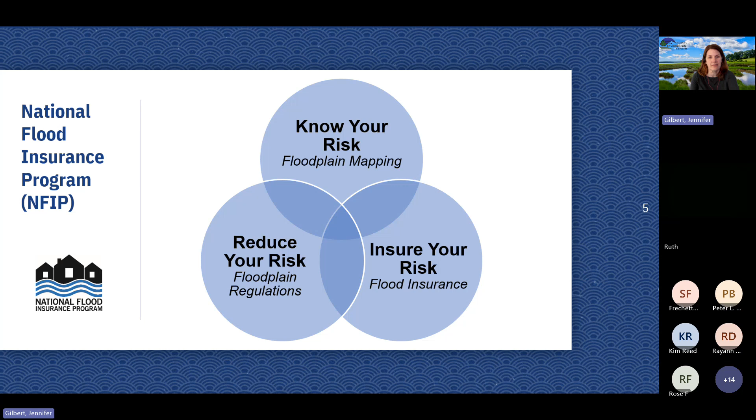All right. So to get started, we have to understand the types of buildings that are in the community and how they relate to substantial improvement. So first of all, there's existing buildings. These buildings were built prior to the initial flood insurance rate map that was issued for a community. These are also known as pre-FIRM structures, which is pre-flood insurance rate map. These houses were also built before any community floodplain regulations were in place. So it was before communities had joined the program.

So in New Hampshire, initial flood insurance rate maps range from the 1970s up to the 2000s. And generally, the initial flood insurance rate map and the date the community joined the NFIP are the same. So in this case, these existing homes, as you can see from the picture here, would not account for the base flood elevation. The base flood elevation is the height the water would get to during a 1% chance flood event. Since they didn't have any standards to build by, they just built wherever the land was without much recognition of what the flood risk was at the time because there were no maps. So these homes are the ones that the substantial improvement, substantial damage provisions would apply to if they met the criteria.

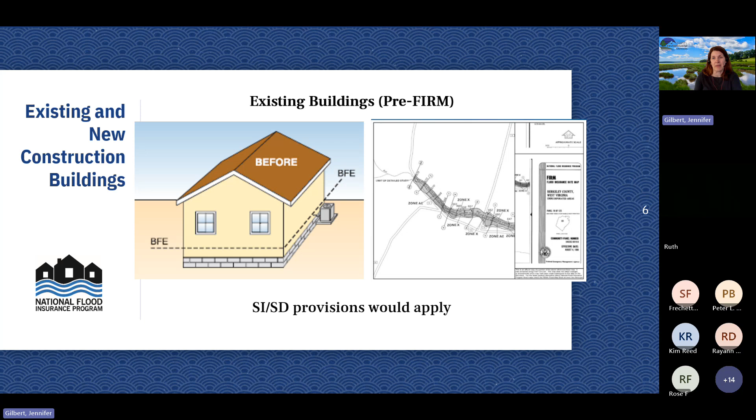The next set of buildings that you would find is new construction buildings. These are called post-FIRM buildings, post-flood insurance rate map buildings. So these homes were built when there was a FEMA map in place. It was after those initial flood insurance rate maps. It was also after the community has adopted their floodplain regulations. So in theory, those buildings should have been built in compliance at the time of the map that was in place and the regulations that are in place.

So the substantial improvement and substantial damage provisions would apply if there's a new map that's been issued since that house was built, if there's been an increase in the base flood elevation since the house was built, or the community's floodplain regulations have changed. For example, some communities required that the lowest floor be elevated to at least the minimum requirement of at or above the base flood elevation. Many communities now enforce that the lowest floor has to be elevated at least 1 or 2 feet or more above the base flood elevation.

So that's important information to know about these new construction buildings, because even though they were built at that time, things could have changed and they may need to be going up depending on certain circumstances. And we'll be kind of going through this in the building scenario part of the presentation.

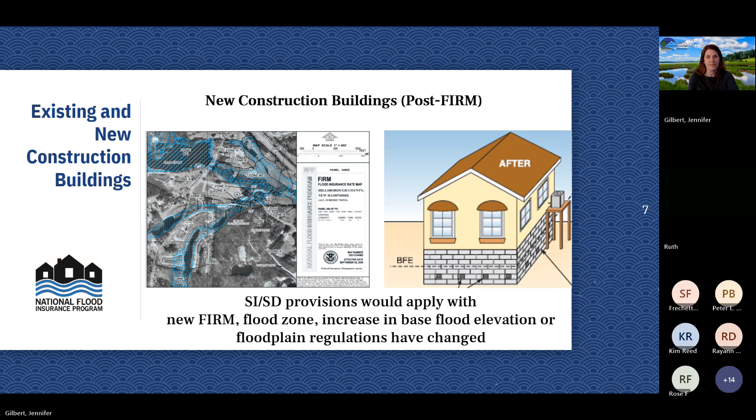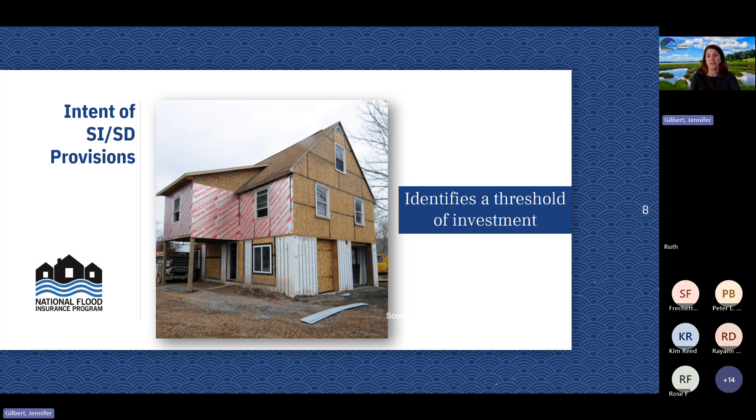All right, so the intent of the substantial improvement and substantial damage provisions is really to identify a threshold of investment above which improvements need to be done in a stronger, safer, smarter way. It also provides an opportunity to reduce or eliminate future costs and damages for existing structures. And it provides an opportunity to break the cycle of disaster damage, reconstruction, and repeated damage.

There are 2 main FEMA resources that are great places to go if you have questions or need more information about substantial improvement and substantial damage. First, there's the Substantial Improvement Desk Reference. This is the resource that I used a lot. Anytime I got questions about substantial improvement, substantial damage, I would be going to this. Even though it's dated 2010, it's still useful. It's still applicable. It's got a lot of great information in it.

In 2018, FEMA updated their answers to questions about substantial improvement, substantial damage buildings. This references the desk reference a lot, but it's in a question and answer format. So if you have a particular question, sometimes you can find that question directly in this resource and find that answer in there. So most of the information that I'm presenting today comes from these sources. So I just wanted to highlight them so you know that this is a place where you can go to find out more information.

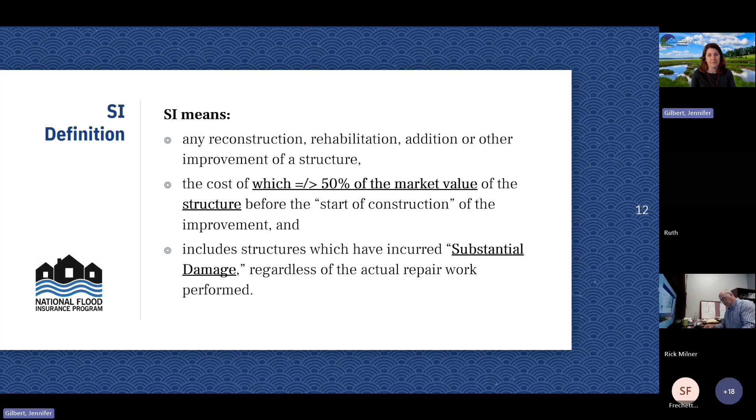So I've had questions in the past of why is it 50%? And that was really chosen as a compromise between two extremes. One extreme would be to prohibit all investment in existing non-conforming buildings that do not meet the minimum NFIP requirements. The other extreme would be to allow buildings in flood hazard areas to be improved in any fashion without regard to flood risk. So that's where they came about with the 50%, which a lot of people call the 50% rule. The term substantial improvement does not, however, include either of the following.

Any project to correct existing violations of state or local safety code specifications identified by a local code enforcement official. So to be excluded, the cost must be the minimum necessary to correct a violation or condition that predates the application and was previously cited by an official who has authority to enforce the community's health, sanitary and safety codes. So this is not something that's going to be found at the time of the substantial improvement determination. It should have been already documented as an issue prior.

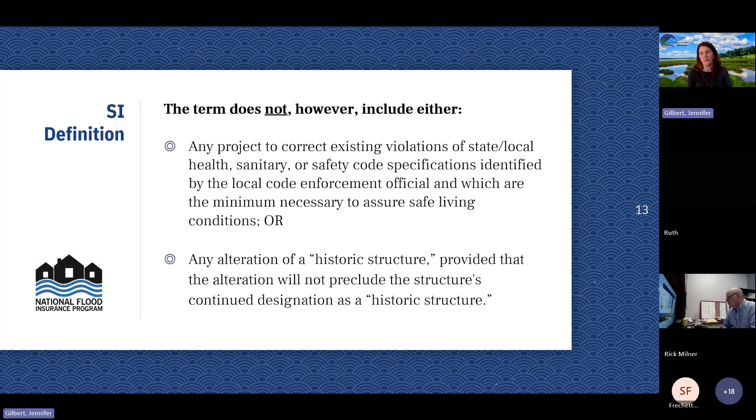The other exemption is regarding historic structures. Any alteration of a historic structure, provided that the alteration will not preclude the structure's continued designation as a historic structure. So again, the community's floodplain ordinance defines the criteria for what is a historic structure, which is usually on a state or federal register. So those do not have to meet the substantial improvement requirements. There is a great FEMA guidance document about historic structures, and it goes more into these details about this exemption and what can be done with historic structures.

Okay, some substantial improvement examples. Rehabilitation or remodeling of a structure with or without modifying the external dimensions. So if you have a structure that gets torn down, but the footprint of the foundation remains the same and you just build new on it, that is considered a substantial improvement. Lateral additions that may or may not involve structural modifications of the load-bearing structure of the existing structure. This is an example we'll be going through during the building scenarios later in the presentation.

Vertical additions, repair, replacement of foundations, including extending existing foundations, repair of damage of any origin that is necessary to restore a structure to its pre-damage condition, work on structures that were compliant at the time of construction. Again, it's one of those where you have a new construction building where either the flood zone changed, the base flood elevation changed, or the floodplain regulations of the community had changed.

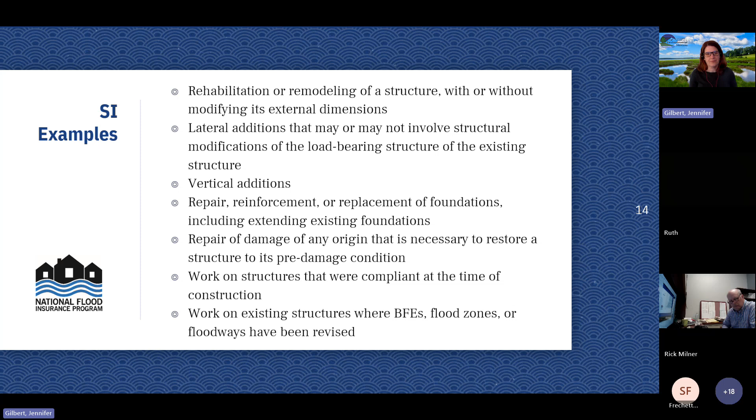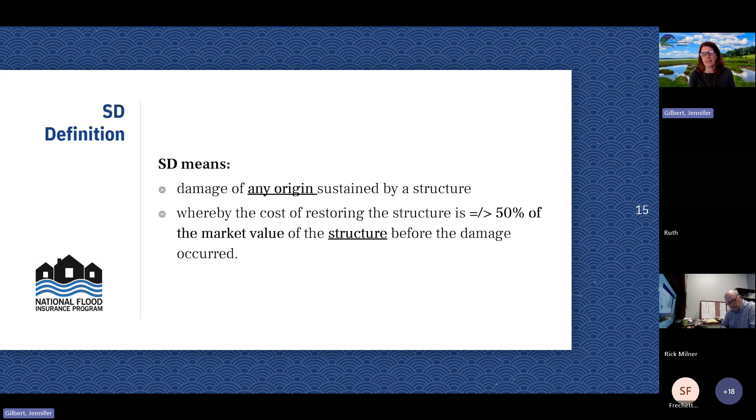All right, so we're going to the substantial damage definition now. Substantial damage means damage of any origin sustained by a structure, whereby the cost of restoring the structure is equal to or greater than 50% of the market value of the structure before the damage occurred. Now, there's no exemptions regarding substantial damage, although substantial damage and substantial improvement are intertwined. So if you do have, for example, damage to a historic structure, that exemption is still in place.

So some substantial damage examples include, and this is in reference to the fact that the substantial damage definition says damage of any origin. A lot of times it gets confusing because it's a part of a floodplain ordinance, so people think it's only because of a flood. But it can be of any origin, whether it's a natural disaster or a man-made event. Flood, tornado, wind, house fire, a burst pipe.

Some of these on the list are ones that I actually have dealt with in the past. We had the tornado that went through New Hampshire in 2008. As you may recall, it went around Northwood Lake. Some of the homes around Northwood Lake were damaged, and they were in the floodplain of Northwood Lake. I did some outreach with the town of Northwood to remind them of the substantial damage requirements.

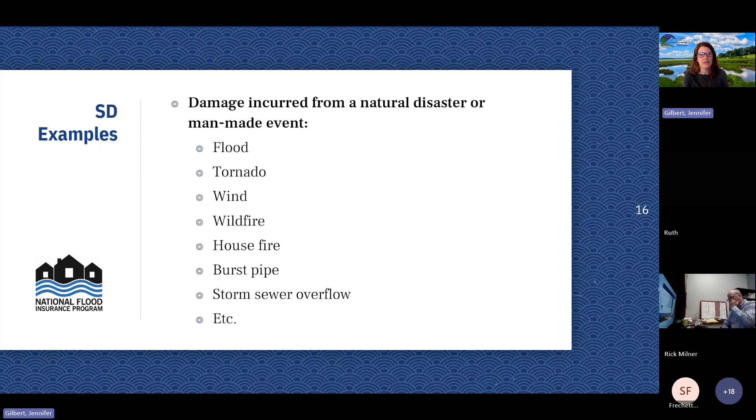Okay, so the provisions that are in a floodplain ordinance for a community that participates, this language comes from the Code of Federal Regulations, which a lot of communities have adopted over time. It requires that all new construction and substantial improvements of residential structures within Zone A's on the community's FIRM have the lowest floor, including basement, elevated to or above the base flood elevation. That's the minimum standard established under the NFIP.

The one thing that I learned with this language is it really doesn't highlight substantial damage. The only way you can link substantial improvement to substantial damage is by looking at the definition of substantial improvement, which has that reference to substantial damage, and then you can go to the definition of substantial damage. But in case nobody goes to the definition, you don't necessarily see it, and so sometimes it can be out of mind. One thing that I did when I updated the state's higher standards model ordinance is I specifically put substantial damage into the ordinance language itself so that it's not only substantially improved, but substantially damaged as well.

The other thing that I want to highlight in here is that I also put 1 foot above base flood elevation. So this is just a reminder that our state building code as of 2015 did require that all structures in a special flood hazard area be elevated at or above 1 foot above base flood elevation. So just a reminder on that. And in addition, the state building code that we have now, which references the 2021 I-Codes, does have these same substantial improvement and substantial damage provisions in the code as well. And in those provisions, they specifically call out substantial damage in the regulations, as well as substantial improvement.

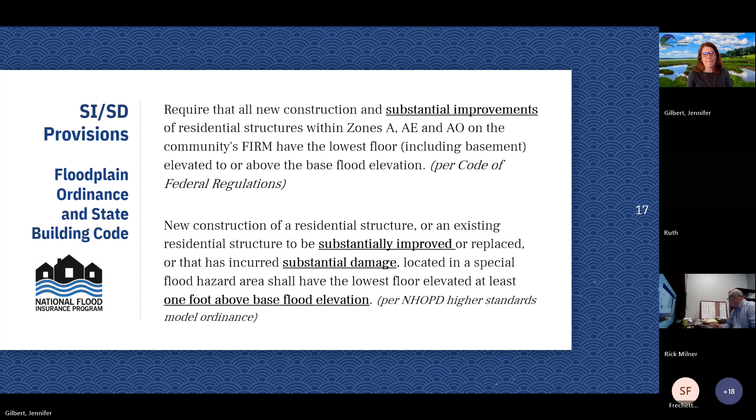All right. So when a structure is determined to be substantially improved or substantially damaged, it must be brought into compliance with requirements in your community ordinance as if it was new construction. So what does a compliant residential structure look like?

So this is an example of a new construction in a zone AE. What we have here is you need to have the lowest floor at or above that base flood elevation. There are certain things you can do to help elevate this. This house is built on a full foundation system, which you are allowed to do to get that lowest floor at or above that base flood elevation.

In addition, there's a couple other things that have to happen to make this enclosure compliant. It has to have the required number of flood openings in the enclosure walls. It can only be used for parking, access, or storage. And the floor of that enclosure has to be at grade on at least one side. In this case, this space is being used as a garage. It has the flood openings, and it moves the lowest floor up to that base flood elevation.

This is an example of a new construction in zone VE. You have wave action in zone VE, so there are different standards. You cannot have full foundation walls in VE zones because of that increased velocity. So you have to elevate on piers, post piers and columns, which is an example here.

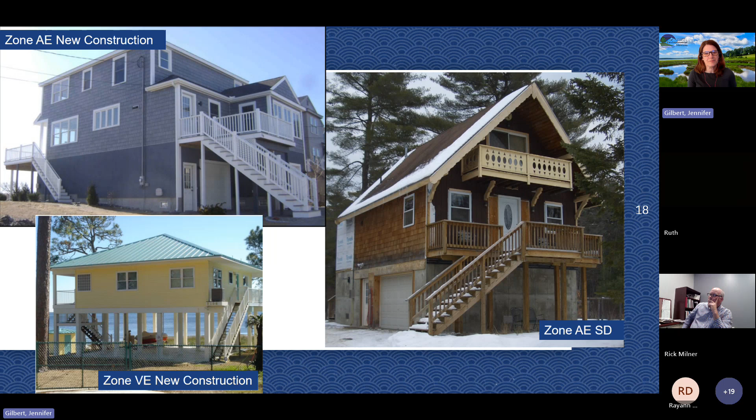Shanti, do you have a question? Yeah, I have a quick question that has to do with the historic exemption.

Yep. We're not qualifying if it can be maintained as a historic building even after the work has been performed, then it's not subject to the same restrictions as would be — this is from the International Existing Building Code, but it looks like it lines up with what you said earlier. So the question is, because we have a historic building that we're working with near the water, and they want to put an addition on, and it would be less — the cost of it would in fact be less than 50% of the market value, but it would also maintain its designation as a historic building, regardless of the cost of construction.

So we're at this gray area, we think it's a gray area. Hopefully you can answer: with respect to their floor, it will be at elevation 8, whereas we would want them to be a foot above elevation 9. And they may or may not be able to do that. But given this section for exemption on historic, would they even be required to? Could they put an addition on and not comply with the elevation requirements because it'll be a historic building before and after?

That is a good question. I'm questioning — I'm thinking in my head about the addition part. That's kind of stumping me. Usually I've dealt with interior improvements to a historic structure, but the addition piece — my thought is that exemption still remains in place, but I would want to follow up with you on that, because the addition piece is an interesting question.

Right. So we talked before about the provisions for residential structures, but I didn't really go into non-residential structures. Non-residential structures are required either to elevate so it's at or above the base flood elevation, just like residential structures, or it must be dry flood proofed so that the area of the building below the base flood elevation has to be dry flood proof, essentially cannot let the water enter the building. So you have to retrofit doors to prevent that from happening. You also need a floodproofing design certificate, which is certified by an engineer.

So in this case, the proposed substantial improvement is an interior improvement to an existing non-residential structure in Zone A. It's been determined to be a substantial improvement. They chose to dry floodproof instead of elevating. So they just need to go through that process of providing the required documentation for that floodproofing.

Peter? Yeah, I'm just wondering, can this building be occupied then? I mean, doesn't it seem like if they're dry floodproofing, they can't open the doors during a flood. So does it have to be unoccupied, or is there any, do they speak to that at all?

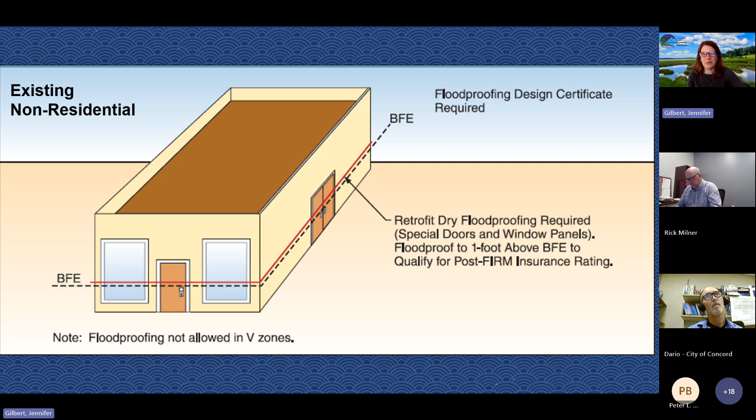All right. So manufactured homes, this is an existing manufactured home. It has its floor below base flood elevation. It's in an A zone. The proposed work includes improvements to the existing home and a lateral addition.

So what needs to be done with this is because there's improvements being done to the original building and the addition has caused it to be a substantial improvement, both the existing structure and the addition would need to be elevated as if it was new construction. So it needs to be elevated above base flood elevation. The anchoring needs to be attached to a permanent foundation, which it already was, but just lifted up. So that's an example of when you have improvements to the existing structure and an addition.

So this is another existing building in Zone A. It's slab on grade, and below base flood elevation is the lowest floor. They don't propose any improvements to the original building, but they propose a lateral addition, and there's going to be no structural modification made to the common wall or the roof. So what do they need to do?

Because it's a substantial improvement, the lateral addition will need to be elevated as if it was new construction, based on the current map and current regulations. But because there was no improvement made on the existing building, and there's only essentially a doorway between the two, with no structural modification to the roof or the house, only the addition needs to be elevated to that base flood elevation. Again, they have an enclosure that has flood openings and meets all those other requirements.

So this is an example of an existing building in Zone A. It was slab on grade. The proposed work includes a lateral addition and work on the original building, which does include a structural modification of the common wall or the roof. So the proposed work, the addition and the improvements to the original house, was determined to be a substantial improvement. So not only does the addition need to be elevated and brought into compliance as if new construction, but the existing structure does as well, because of those improvements made and because of that structural modification.

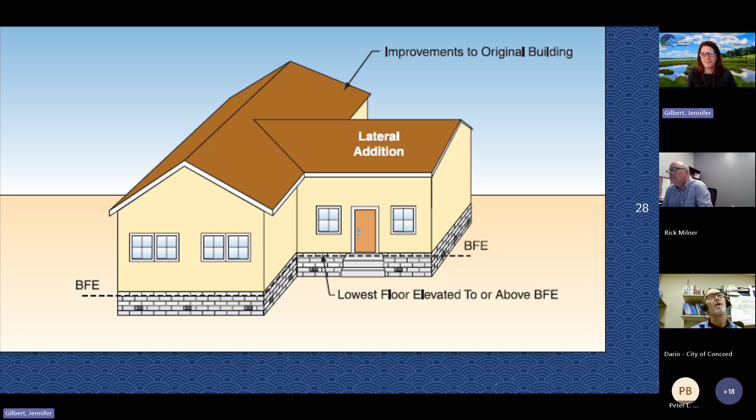All right, so now we'll move into a V zone. These V zones are the ones that are elevated on post, piers, and columns. This is an existing residential building in a V zone. It's slab on grade, and the proposed work includes work on the original building, and they want to do a lateral addition. So this was considered a substantial improvement. This is what would need to happen to bring it into compliance: it would need to be brought up on post, piers, or columns to get above that base flood elevation, and the addition can then be added. So both the existing structure and the addition then need to be elevated to bring this into compliance.

So now we have an existing residential structure in Zone VE. The proposed work includes work on the original building and a lateral addition, which are both considered a substantial improvement. You can see this one is already on post, piers, or columns, but the lowest floor is still below base flood elevation. So what needs to happen? These are two options if someone wanted to do this: bringing that whole house up further above that base flood elevation, whether the vertical addition is on top of the existing structure or below it. That is what needs to happen for it to be brought into compliance.

All right, so another new construction residential in Zone VE. This is new construction, a little different than what we were talking about with existing buildings that were built prior to the maps. All improvements, including additions or repairs to a new construction building, must be elevated to at least the height of the new construction building, regardless of the value of that work. The work shall not compromise any of the NFIP requirements that the existing building was required to meet when it was initially built.

So somebody has a new construction building that had been built in compliance, above base flood elevation. They want to put an addition onto that house. That addition has to meet the same requirements as that existing structure, regardless if it's a substantial improvement or not. It has to remain the same. If it didn't meet the same requirements, it would bring that whole structure out of compliance. So you don't want that. That's a case of that.

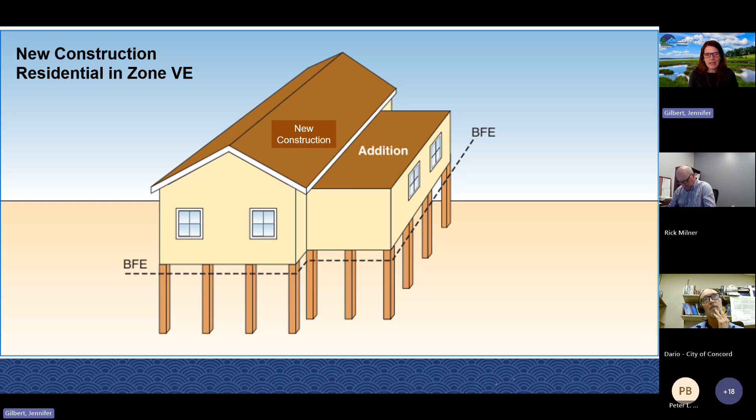And then one last building scenario. This is a new construction that was built to the base flood elevation that was in place at that time that it was built. Since that time, there's been a new map with a new base flood elevation. And now they want to add a lateral addition to that structure.

There's no improvements proposed for the original building, they just want to add the addition. So what will need to happen is the addition will need to now meet the new base flood elevation requirement and be elevated farther up than the existing building. The existing building does not need to meet that base flood elevation because there's no improvement. Also, I forgot to highlight that there's no structural modification between these two buildings, it's just a doorway from one to the other. If there was a structural modification here, that existing building would also need to meet the new base flood elevation.

So that's a lot. Shanti, question? Yeah, so maybe I had it wrong then. So if the addition even doubled in cost relative to what the existing market value is of the existing structure, you wouldn't have to do anything with the existing structure. Is that true? I thought that once you went beyond that 50% with the addition, now you'd have to raise the existing as well. But no, only if you're doing something in the existing. Is that what you're saying? So I could do a $2 million addition onto a $1 million home, and only the addition would need to meet the BFE requirement. Is that right?

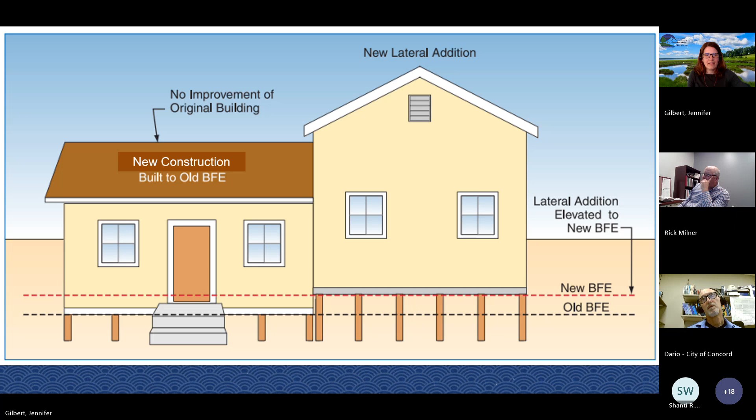All right, so administering the substantial improvement, substantial damage requirement requires local officials to perform essentially 6 major actions.

Review the application for substantial improvement determination, verify costs of the improvements and/or repairs, determine market value of the structure, make and issue the determination, require owners to obtain permits to bring that structure into compliance with the floodplain regulations, and maintain documentation.

So I've mentioned this before. It's very important to ensure that property owners in special flood hazard areas are aware of the substantial improvement and substantial damage requirements. A lot of times they may not think about some of the things they're doing, but hopefully they should know when they need to get a permit. You see this issue more with substantial damage, because when buildings get damaged, property owners have a tendency to want to fix things right away. But that doesn't give the community enough time to look at the structure and see the amount of damage before they start trying to fix or clean things up. So they just need to be aware of those requirements.

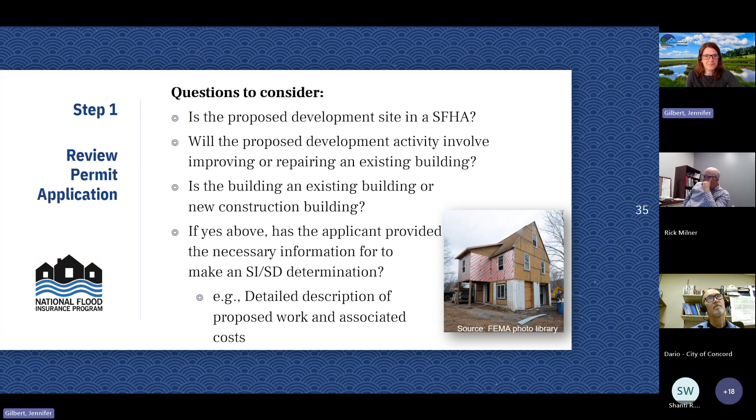So for step 2, verifying costs. The applicant submits the proposed costs. Some acceptable sources of cost information include itemized construction cost estimates prepared by a licensed contractor, building valuation tables, or other professional building cost estimating services. It's really important to compare the construction plans to the accompanying cost estimate to verify that those project costs are reasonable and are listed for each component of the improvement, and sometimes to field verify that the existing structure matches the proposed improvement plans, like making sure the footprint size and orientation compare to the improvement plans. So little things like that.

Especially with damaged structures, make sure the proposed costs include all the work necessary to restore the structure to pre-damage condition. Sometimes property owners, for various reasons, will not want to repair it completely, but they really need to consider all the proposed work necessary to get it to that pre-damaged condition.

This is not an exhaustive list, but some of the items included in the FEMA desk reference are materials and labor. Estimates of donated or discounted materials need to be included in the estimate, with some estimated costs attached. You'll see this a lot after substantial damage - charity organizations come in and offer labor to help people rebuild, but that labor cost needs to be accounted for in the costs.

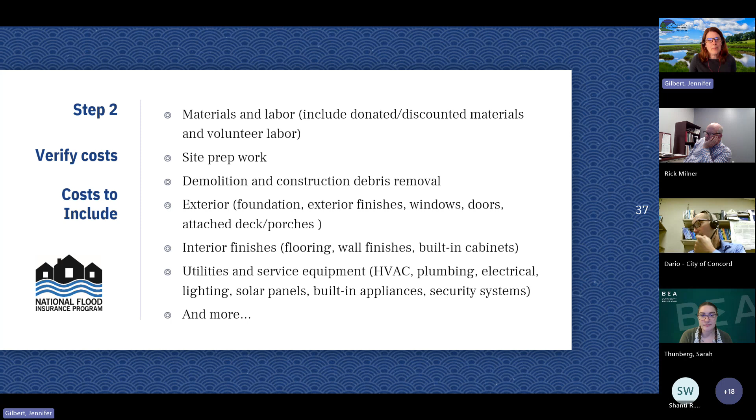Some costs to exclude: cleanup, trash removal, land surveying costs, costs to obtain plan specs, permit inspection fees, costs to correct previously cited violations, outside improvements - this is strictly related to substantial improvements, since substantial damage is strictly related to the structure, so nothing outside of the structure - and plug-in appliances.

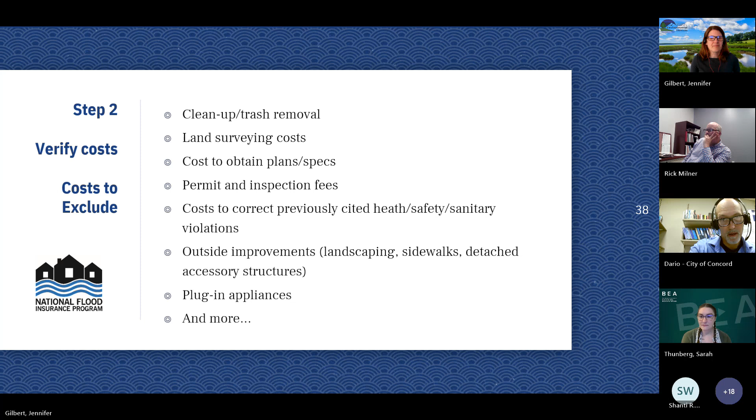All right, so market value - this is always a good one. The requirement is to determine the market value of the structure, not including the land value, because again we're only talking about the structure, before the start of construction of the improvement or the occurrence of damage. Market value refers to the price that a seller of real property can expect to receive from a buyer in a fair and open negotiation. That's what the guidance says in the desk reference. As you'll probably note, market value is not defined in the floodplain ordinance - it's not one of the definitions. So you really have to go to the FEMA guidance to understand that.

So for substantial improvement, substantial damage determinations only - okay, I talked about that already, sorry.

So acceptable sources of cost information include the assessed value of the structure, or property professional appraisals by a professional appraiser. Most communities in New Hampshire do use the assessed value of the structure as the market value. That has worked the best for all communities so far.

There are cases where I've helped communities who have had property owners that did not agree with the assessed value of the structure. And at that time, the community can allow that property owner to get a professional appraisal done, and submit that to the community. The community can review it and determine if they'll accept that.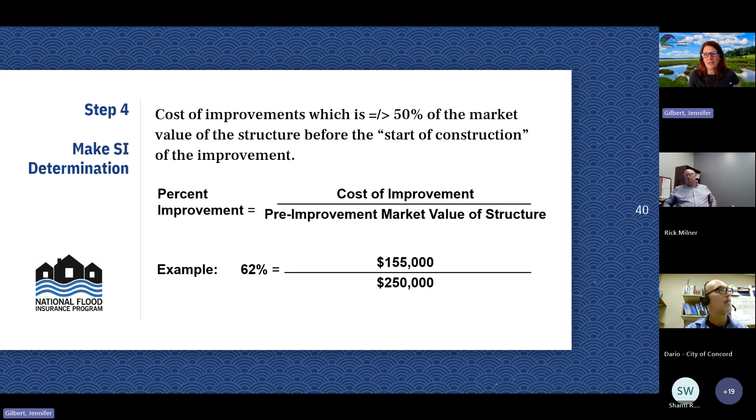FEMA does provide guidance that anytime you're between 40 and 60%, maybe you need more detailed information to make sure that the determination is as accurate as possible, because when it falls in between that place, it could be a little bit more questionable. So the more information, the better, when you're in between those two percentages.

Same with substantial damage, the same type of formula: the cost of repairs over the pre-damage market value of the structure equals the % damage. So this one comes in at 40%. Maybe if it's 45%, that's where you may want to really start looking at it. It just depends on if you feel like you have the right enough information about the cost value or feel the market value is adequate.

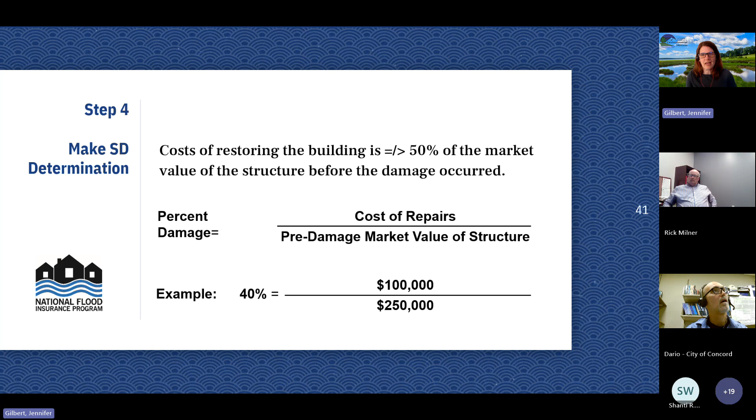So also in step 4, it's issuing that determination to the property owner. That's important not only to have for your records, but also for the property owner to have on file. It's also important if it's not a substantial improvement or not a substantial damage to also issue that letter, not just when it is. So there are various sample letters in that DES reference that can be used to help create those letters.

So the property owner may appeal the substantial improvement, substantial damage determination on the basis of the cost, an appropriate valuation of the cost, an appropriate method of the determination of market value. But if this is a determination by the building official, it'd be the same as any other appeal, which would go to the zoning board of adjustment.

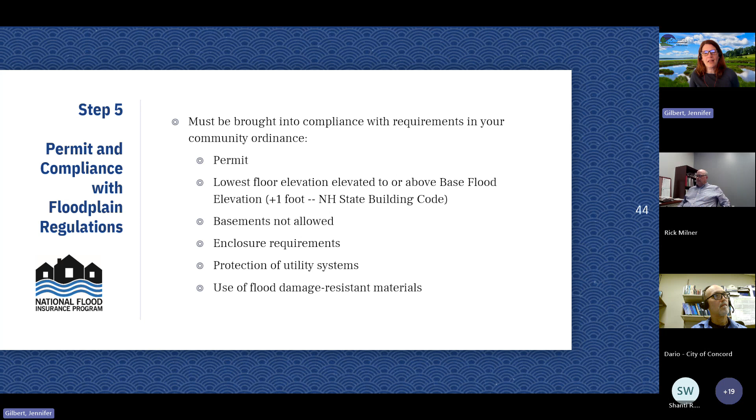All right, so step 5, this is the part where they've been determined to be a substantial improvement or substantial damage. Now you must work towards making sure that the improvements, whether it's the existing building or the addition or both, meet those requirements. Obviously, you need a permit. Any development in a special flood hazard area requires a permit. So as we've referenced before: lowest floor above the base flood elevation, no basements, enclosure requirements are met, utilities are protected or elevated, and the use of flood damage resistant materials.

So there are several solutions that can achieve compliance, and how they're selected is based on the given structure and several factors such as what flood zone it's in, the type of foundation, the feasibility, and whether or not the structure is residential or non-residential.

So you can elevate in place, which means if it's on a foundation wall in a zone A, as you can see from the building scenarios, it's just elevating up that foundation. In some cases, if you have a 2-story, you may decide to abandon the ground level for living purposes, move any utilities up to the upper floor, and make that lower enclosure meet the enclosure requirements of having flood openings and being at grade. That's one scenario.

Extending those foundation walls upward, converting a walkout basement to a compliant enclosure. I worked for over a year with a resident in Merrimack after the 2007 flood. They had an existing building that was substantially damaged. They needed to make sure that the lowest floor was above base flood elevation.

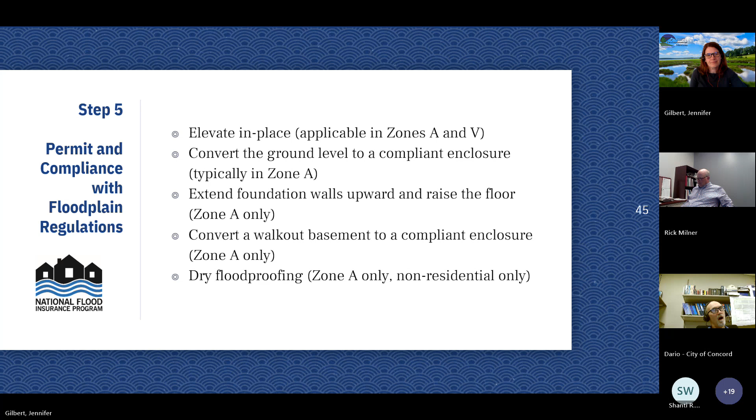So when a proposed work is not a substantial improvement or not a substantial damage, it does not need to meet the requirements as if it was new construction. There are still permitting requirements. It's still development in the special flood hazard area, and then all other federal and state permits that may be needed would need to be received for that improvement.

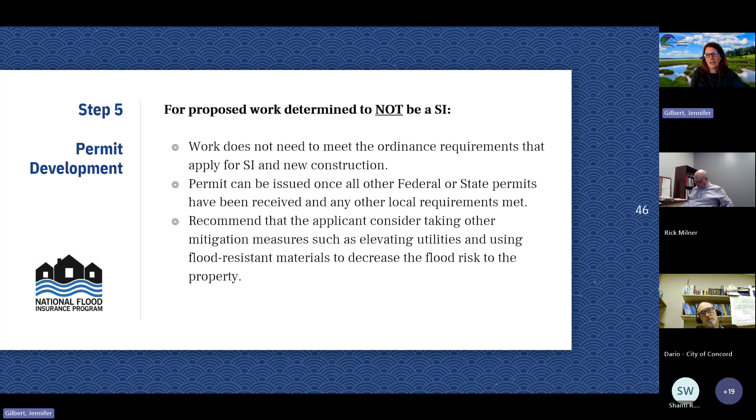Certainly, if they're doing something to the house, it's always good to recommend that they do a little something that could help them out, especially if it's an existing building that has an increased flood risk. Even just looking at elevating the air conditioning unit can also help out in the end, or making anything that's below the base flood elevation with flood resistant materials is also helpful as well.

All right, off to step 6 is maintaining documentation. As a participating community of the National Flood Insurance Program, communities are required to keep all records on file anyways, but it's important to maintain for these cases permit applications, the documentation of your determinations, how you calculated it, and the official determination letter to the property owner.

If you have a historic structure, making sure that you have that documentation in place that allows that exemption to happen. The as-built elevation data or the elevation certificate, variance proceedings, and any other documentation or certifications that are needed.

All right, so I've got another poll. Sorry, Kim. Let's see, is this going? All right, so that should be in your chat, except for Kim's chat, unfortunately.

So which item is not a cost to include for a substantial improvement, substantial damage determination? I know I'm going a little hard on this one because I went through that list kind of fast, but it looks like everyone caught on to what I was talking about with the fact that land surveying costs are not included in a substantial improvement, substantial damage determination. So great job.

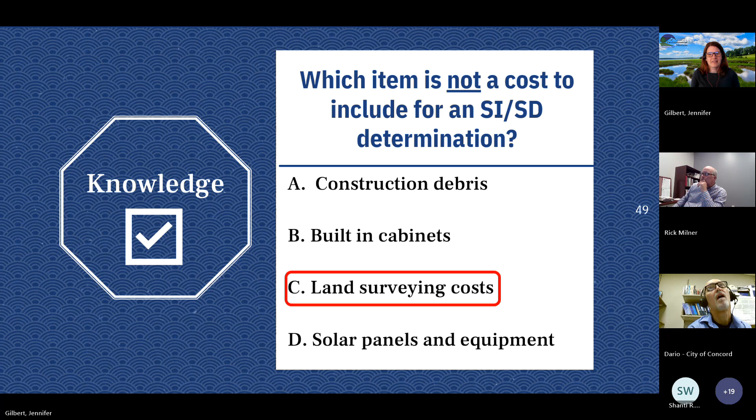Okay, so we're at almost 3:15, so I'm going to be starting to go into some of the resources that are available. Again, I mentioned these 2 resources in the beginning. These are the 2 key resources you should have if you deal with substantial improvement, substantial damage. They are available online. I'm not sure if you can still order hard copies, but they're definitely online and will be in your resource page that I send tomorrow.

Okay, so just to highlight a little bit on substantial improvement, substantial damage. I'm not sure how many of you have had the experience of having multiple structures damaged as a result of an event. If you were around during the 2006, 2007 floods, there was a lot of damage as a result of the flooding back then. That was early in my career, and I was helping a lot of property owners and community officials trying to understand the substantial damage requirements and what needed to happen.

And that's a whole other training that I will be doing somewhat soon. But I just wanted to highlight this FEMA substantial damage estimator tool. I can't say that I know of any community that was using this at the time we had the last big event in 2006, 2007. We haven't had a large amount of structural damage since then.

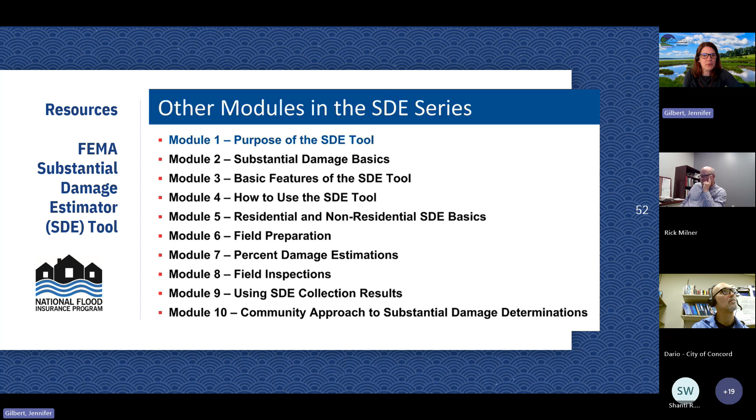Also in 2020, there was this building code and floodplain administration and enforcement policy. Following a disaster declaration, communities may apply for public assistance funds to administer and enforce building codes and their floodplain ordinance. It's meant to help assist local floodplain administrators or building officials in making determinations.

Some examples of eligible work include conducting field surveys, establishing damage trends, preparing cost information, hiring and training staff, collecting field data, and many more things. It is limited to 180 days after the disaster declaration. I don't believe that we've ever had this yet because, again, we haven't had that level of structural damage like Vermont does. I do believe that they tried to access this.

And I am definitely not the expert, and I think our friends at Homeland Security and Emergency Management are the ones that can really assist with answering any questions regarding this policy. And I think some were going to be on the call here today. But again, just wanted to highlight it as something that's out there.